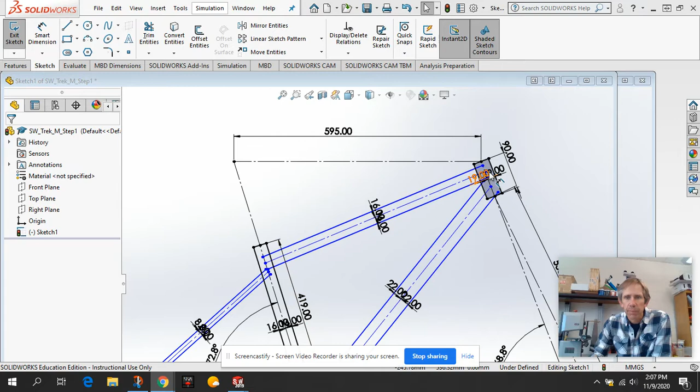First, we're going to move this down tube. Since these are still undefined blue lines, we can move them around a bit. I'm going to move the bottom of this down tube up just a little, and now my top tube looks pretty good. You want just a small gap, maybe 5 to 8 millimeters, right there. You don't have to measure it, just get a good visual gap, and you want this distance and that distance to be kind of matched.

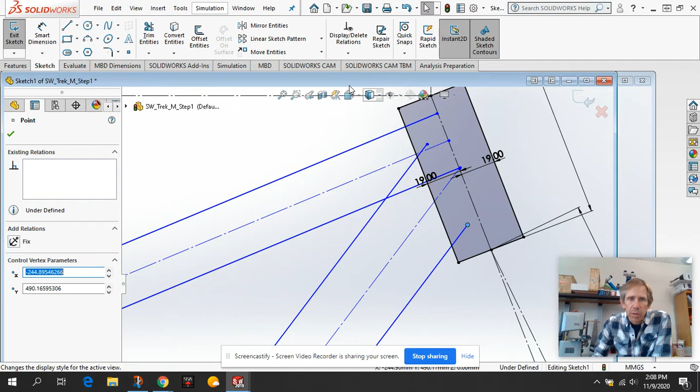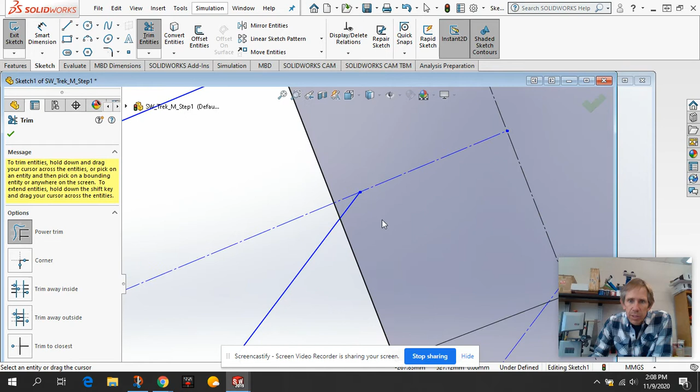Now that I've got that positioned well, I'm going to use a new tool called trim. You just click and hold the button, and as you do that, you draw over what you want to trim. I'll zoom in here, click down and go over, trim that, trim that, trim this, zoom in and trim that, and there's also a really tiny little line right here, trim that.

My head tube should look pretty good now. I have my center lines going all the way to the center line of the head tube, and then the outside of my top tube and down tube.

Now I'm going to go back to the back end of my bike, hit escape, and move my seat stay up a little bit, putting it about there to make them in line. Again, that's just a visual choice.

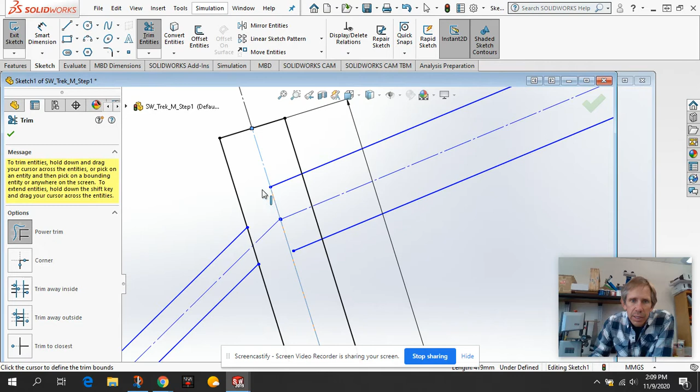I'm going to use my trim tool again, click on it, and go through and delete the ends of these little lines. Oh, I don't want that one, so undo that, and trim that off.

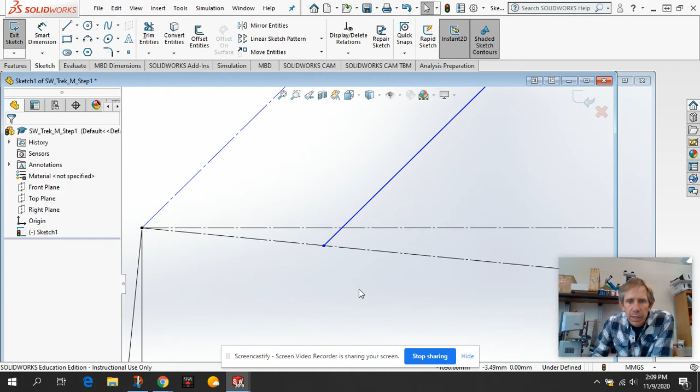Now I want to come down to the rear end with the axle, and trim this line, trim this line, trim this line. Zoom in, trim— nope, edit, undo trim. Trim this little line, and trim this line and this line.

The rear end looks good now, and I'm going to draw a line to connect my chainstay and seat stay together.

Now I'm going to come over to my bottom bracket and use the trim tool again. We've got a whole lot of lines, a lot of scrap we don't need. So I'll trim this chainstay, trim this seat stay, trim the seat stay, trim the chainstay, trim the chainstay again, and that looks pretty good.

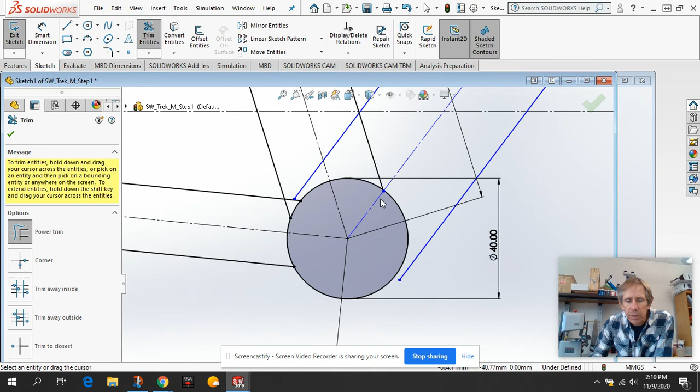Alright, if I zoom out, I should have a completed diagram of a bike frame.